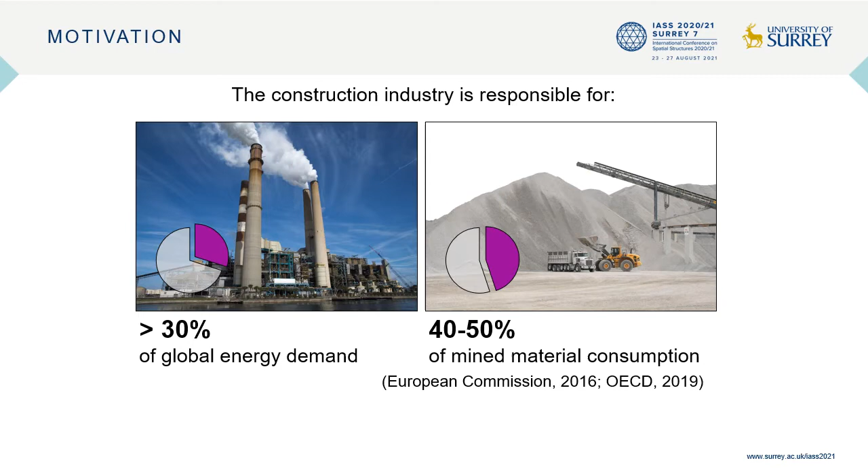Adaptive structures can control forces and deflection to stay within the required limits so that the effect of external loading is reduced instead of relying on a passive load-bearing resistance. Previous works have investigated active control of vibrations caused by extreme loads such as earthquakes and strong winds for buildings equipped with active bracings. Through integrated structural control optimization, civil structures can be designed to adapt to rare high-intensity loads in order to operate closer to required limits, which results in a better material utilization compared to equivalent weight-optimized passive structures.

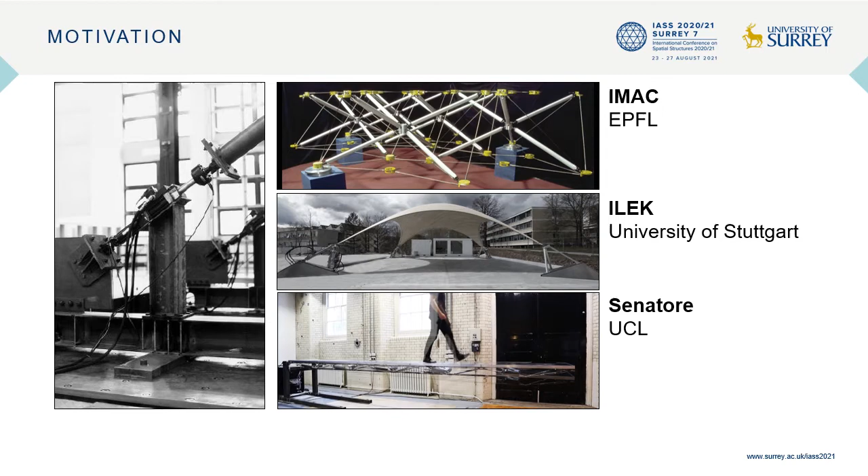Material savings, however, are only possible at a cost of energy that is required to operate the adaptive system. And to address this challenge, a new design method has been developed which produces minimum whole-life energy solutions. The whole-life energy consists of the energy embodied in the material for extraction, fabrication, construction, as well as the operational energy for control. The whole-life energy is a new criterion that allows to obtain adaptive structural systems which significantly reduce material mass, which are minimum energy solutions, thus reducing environmental impacts with respect to conventional passive structures.

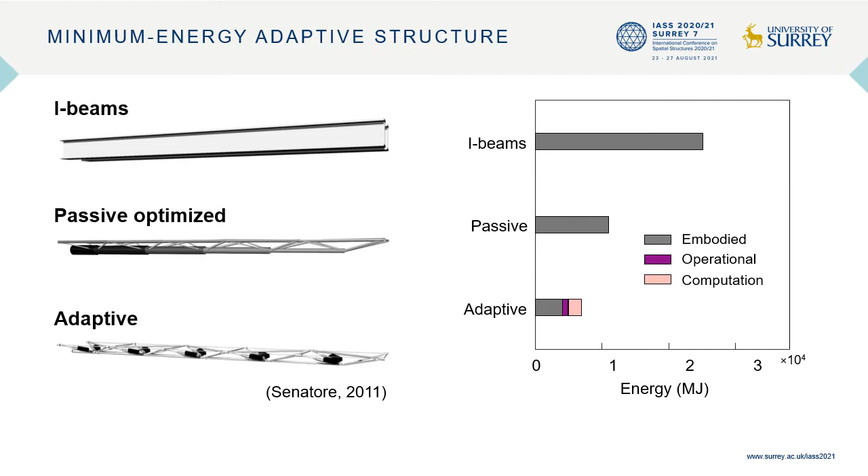Numerical and experimental studies have demonstrated that adaptive structures designed this way have a lower environmental impact, as the total energy can be reduced by up to 40% for slender configurations with respect to equivalent optimized passive structures. In our current study, we are exploring the possibility to counteract the effect of external loading through large shape changes. We developed a new design method which combines shape optimization with nonlinear shape control. The method comprises two main stages.

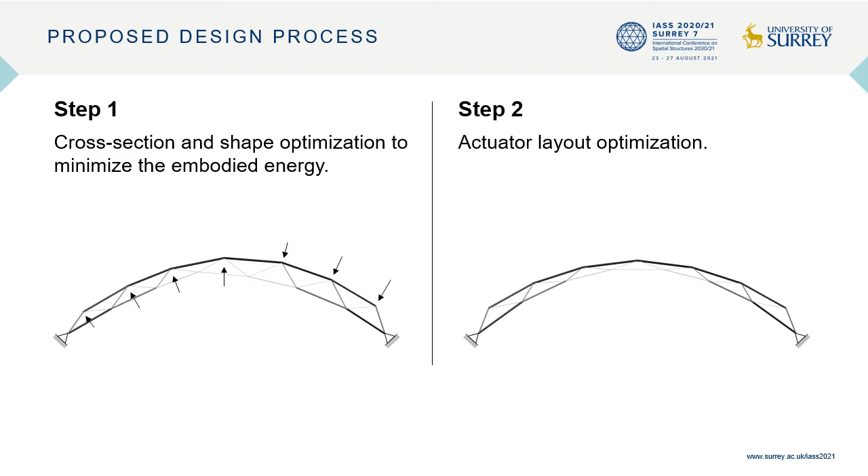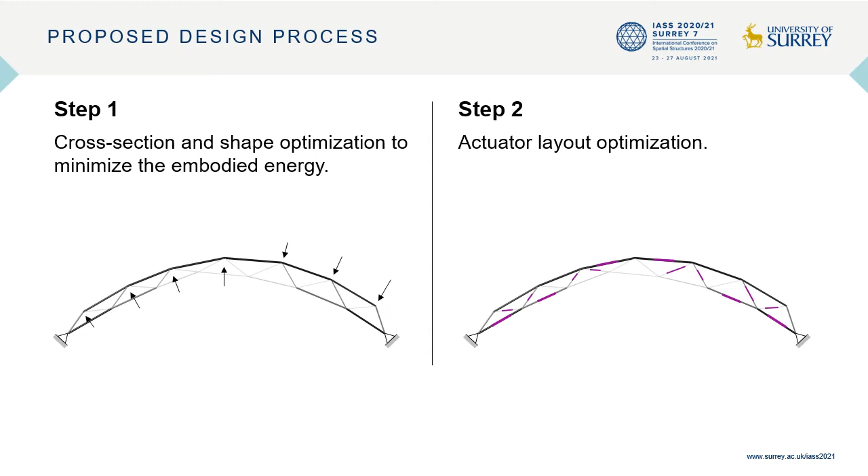In stage 1, the objective is minimization of energy embodied in material through optimization of element sizing and geometry, so that the structure is designed to have an optimal shape under each load case. Under a strong loading event, a change of shape takes place to homogenize stresses, and thus material utilization can be maximized. In stage 2, the actuator placement is optimized so that the structure can be controlled into target shapes obtained in stage 1. A geometric nonlinear force method is employed to solve the inverse problem of obtaining appropriate control commands to control the structure into the required target shapes.

The sizing and shape optimization process takes as input the external load and gives as output the cross-section areas to fit all load cases and target shapes for each load case. It is formulated as minimization of the embodied energy, more specifically the sum of the product of the volume of the elements with material energy density.

The variables include the cross-section sizing, internal forces, and the change of node positions to obtain the target shapes. Internal forces are included in force equilibrium, and ultimate limit state to ensure that element forces are kept within required limits with regard to admissible stress and buckling. There's also a fail-safe constraint so that the element capacity is not exceeded in case of control system failure and simultaneous occurrence of the load.

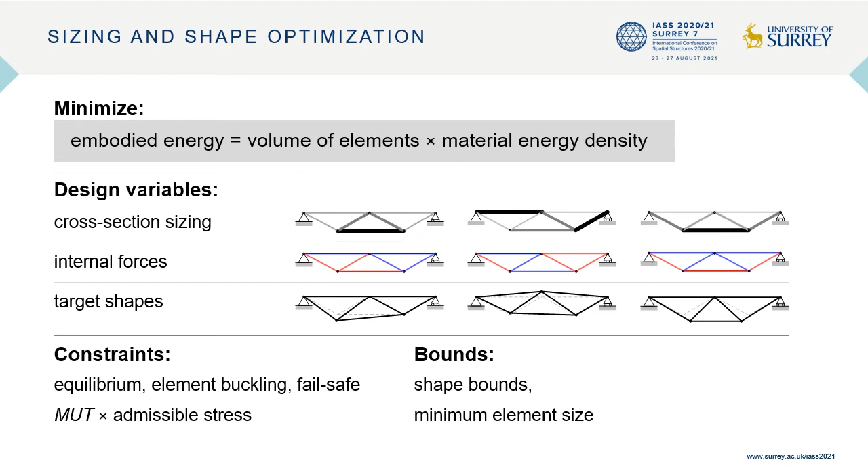This method has been applied to design an experimental prototype structure in order to verify numerical findings and investigate feasibility. The prototype structure is a 6.6 meters long, simply supported truss which comprises 6 bays. The structure is very slender with a span-to-depth ratio of 44:1. The mass of the truss, including actuators, is only 125 kilograms.

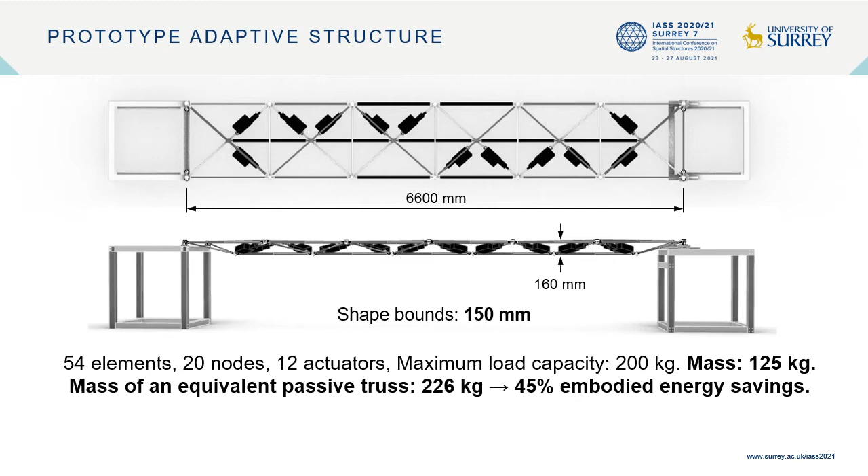An equivalent passive structure designed to meet a deflection limit of span over 1000 would have a mass of 226 kilograms. This means that through this method it is possible to save up to 45% of the energy embodied in material mass. The structure is built using a MERO modular truss system with bolt-type nodes. The decking system consists of frames made of 4 aluminum angle profiles. The frame houses acrylic panels that provide a walking surface.

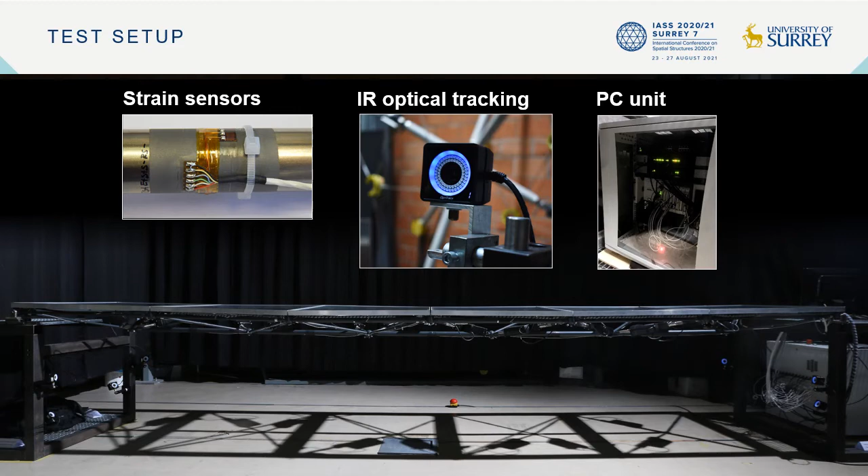The control system is designed to monitor internal forces and node positions. To monitor the element stress, strain sensors arranged in full bridge configurations are installed on each element. An optical tracking system is also employed to monitor the node positions. Element stress and node positions in combination with the actuator stroke length feedback are processed in real time to infer location and magnitude of the external load.

The control framework comprises two processes. First, the shape optimization to obtain target shapes that are optimal to counteract the effect of loading. Second, the shape control to obtain actuator commands that control the structure into the target shapes. The shape optimization is formulated as a minimization of control effort, more specifically the sum of the square of the actuator length changes. Since this process is employed for real-time control, we developed an efficient formulation through a piecewise linear approximation of the nonlinear problem.

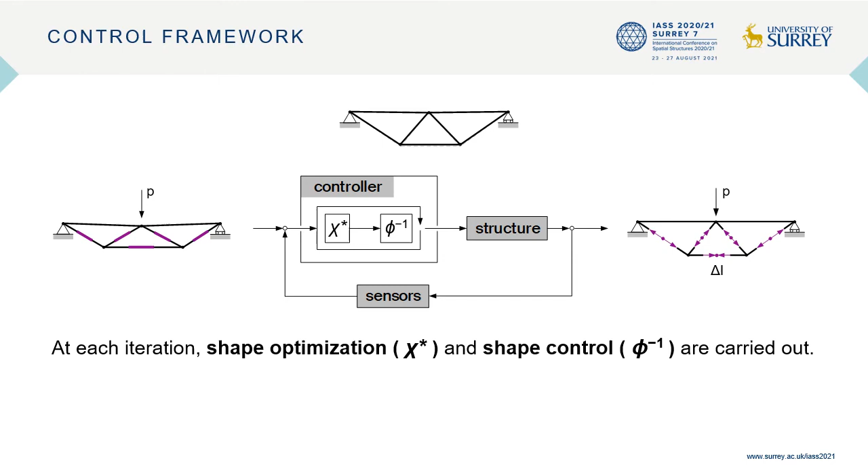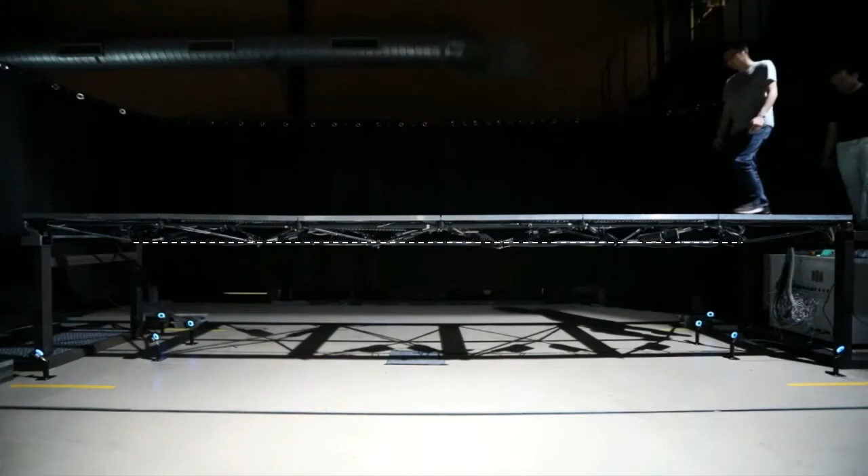Here I present the controlled shapes of the prototype. The prototype is designed to withstand a moving load, which is thought of as two persons with total mass of 200 kg walking on the deck. In this case, I'm showing you the shape when the load is applied on the midspan. And here I present the real-time shape adaptation when the structure is subjected to two moving pedestrian loads.

Here I'm showing the front view of the structure loaded by torsion-inducing pedestrian load before and after shape control. In this case, we can see an overall increase of the depth of the structure after shape control. The effect of shape adaptation is overall reduction of the stress magnitude with a maximum mean reduction of stress up to 23%. Also, the stress variability under shape control is smaller with a maximum variability reduction of 33%.

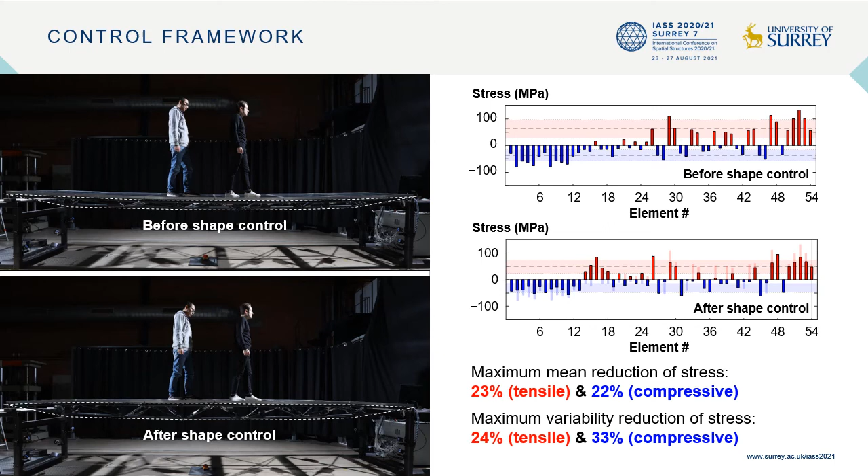Up to 10% of whole life energy savings are achieved with respect to weight-optimized passive structure designed to meet deflection limits of span over 1000. Now we would like to take the overall carbon footprint into consideration. If we consider the actual figures for electricity at EPFL campus, we can achieve a significant carbon reduction of 40%. This shows the significant potential of carbon deferral through the proposed method. This way, we can already make significant savings of the embodied carbon share today, and the operational part may reduce over time thanks to advancement in renewable energy generation.